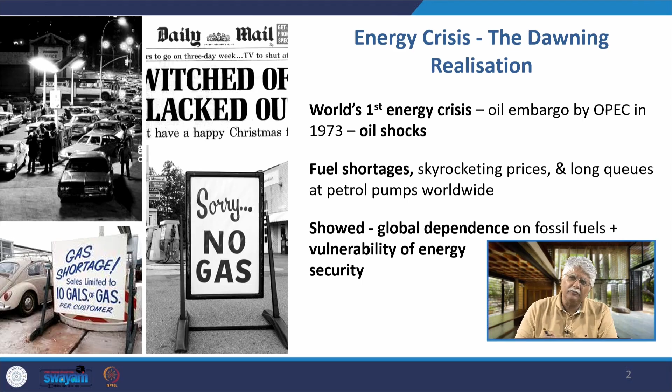There was an oil embargo by the oil producing countries, the organization called OPEC, and this sent oil shocks all over the world. There were fuel shortages, skyrocketing oil prices, long queues at petrol pumps, and this showed there is a global dependence on fossil fuels and the vulnerability of energy security.

Then the impact of carbon emissions on climate. The damage from carbon emissions began to be understood from the 1960s, but there was a strong global recognition in the 1970s to 1980s. Early reports started coming out as early as 1979 with the report Carbon Dioxide and Climate, a Scientific Assessment, the Charney report.

In the 1980s, private documents by oil companies like Shell and Exxon that were secret warned about climate change. Then important milestones came about. In 1987, the Brundtland report came out, and that framed sustainable development globally, influencing building policy.

In 1990, the first green building standard certification called BREEAM came out in the UK. BREEAM stands for Building Research Establishment Environmental Assessment Method. It focuses on energy, materials, pollution and health. In 1993, the US Green Building Council was formed, the USGBC, and the LEED rating system was established in 1998. Around this time, concepts like life cycle energy and embodied carbon began appearing in research work.

Another important milestone in 1997 was the Kyoto Protocol called COP3, the first binding international agreement to reduce greenhouse gases, and buildings were identified as a major sector for energy reduction or carbon reduction.

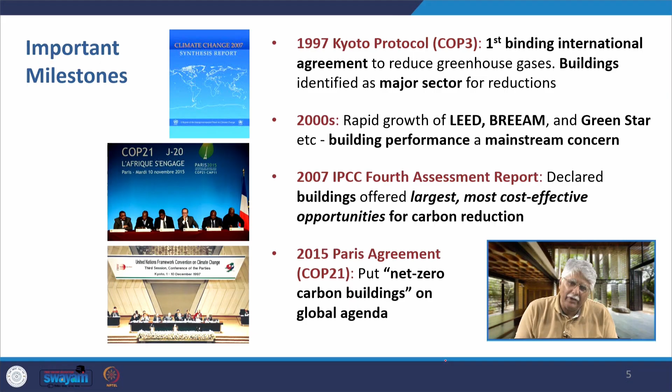In the 2000s, there was rapid growth of LEED, BREEAM, Green Star, etc. Building performance became a mainstream concern, and in 2007, the fourth IPCC assessment report declared that buildings offered the largest, most cost-effective opportunities for carbon reduction. The 2015 Paris Agreement, COP21, put net zero carbon buildings on the global agenda.

Probably last year a UN report by the IPCC came out that declared what was called Code Red, that global temperature was likely to rise 1.5 degrees Celsius in the next 20 years. But 1.5 degrees Celsius from what? From the time of the Industrial Revolution. Global temperature would rise 1.5 degrees Celsius above the temperature during the time of the Industrial Revolution. If that happens, there will be irreversible climate change and global warming.

Already we are seeing the impact of tremendous climate change. Literally a climate change catastrophe is happening with extreme heat waves, drought, flooding, melting glaciers, rising sea levels, especially in areas where we never expected before. Floods, for example, in Frankfurt, droughts in areas that did not witness them before, forest fires are happening.

As a result of this, globally there have been caps established on the amount of carbon emissions nations can emit. For India and China, the cap for bringing the country to net zero carbon level is 2070. That is, by 2070, India is striving to become a net zero carbon nation. Currently, in global carbon emissions, China is at the forefront with 27%, USA at 11%, and India is the third largest carbon emitter with 7%.

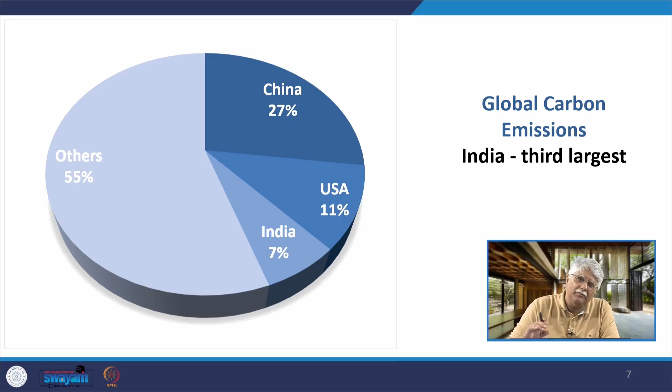Now, when we talk of carbon emissions or energy consumption in buildings, what are we really talking about? We are talking about two things. One is what is called embodied carbon or embodied energy, that is the energy required to make the materials, manufacture the materials used in construction, and to transport them to the site of construction, the overall energy that is embedded in the materials. The second is the operational energy or operational carbon, that is the energy consumed during the operation of the building.

Data reveals to us that buildings contribute to a total of 38% of carbon emissions globally. They are the major contributors according to the 2020 Global Status Report for Buildings and Construction by the United Nations Environment Programme.

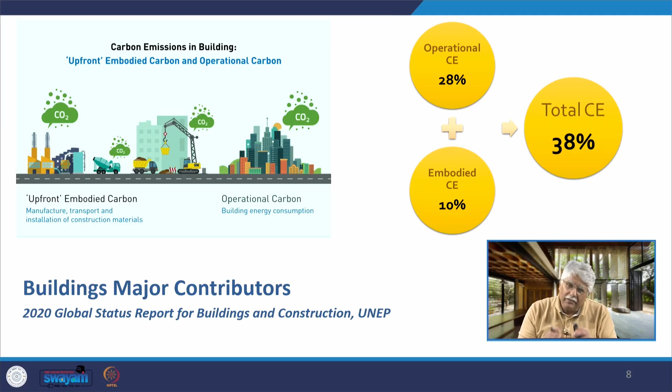So that is why it is vital for us to target buildings to lower carbon emissions, to lower the energy that they consume. Now, in order to understand the difference between a sustainable building and a green building, the concept of sustainable development or sustainability incorporates three principal things: number one is the environment, number two is the economic aspect, and number three is the social aspect, or the people. All three put together lead to sustainability or sustainable development.

But green buildings specifically focus on the environmental aspect of sustainability. That is the difference between being sustainable and being green.

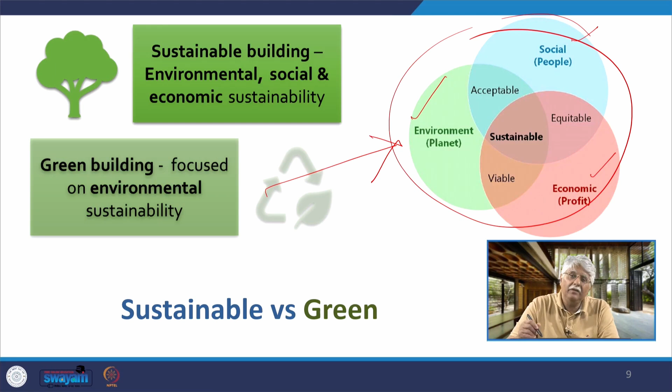There has been a lot of impetus to make green buildings, and now we are also moving towards more sustainability, meaning the social and economic aspects are also becoming important. When we look at the sustainable development goals set up in 2015 by the United Nations General Assembly, intended to be achieved by 2030, out of these SDGs, there are 9 that are a direct impact of green buildings.

So what is a green building? I will give you very simple definitions, you can go and read the detailed definitions later. A green building is the reduction of the negative environmental impact through the design, the construction, and the operation of a building.

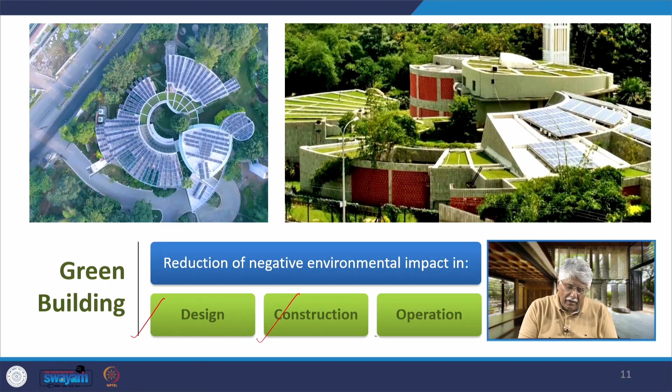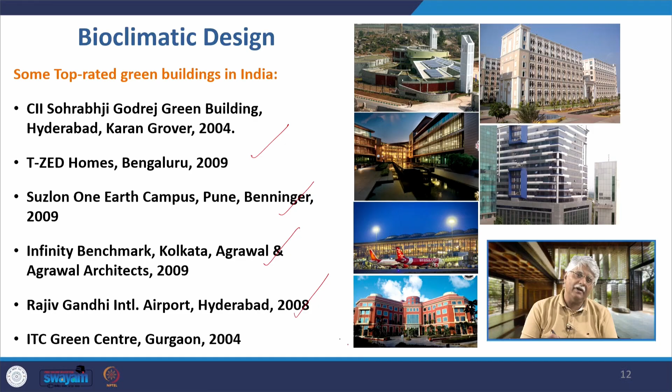When we talk of bioclimatic design, there are some top rated green buildings in India. The one we will be looking at is the CII Godrej building in Hyderabad by Karan Grover. Then there is the T-ZED Homes in Bangalore, Suzlon One Earth campus by Christopher Benninger in 2009, Infinity Benchmark in Kolkata, the Rajiv Gandhi International Airport in Hyderabad, and the ITC Green Center in Gurgaon in 2004.

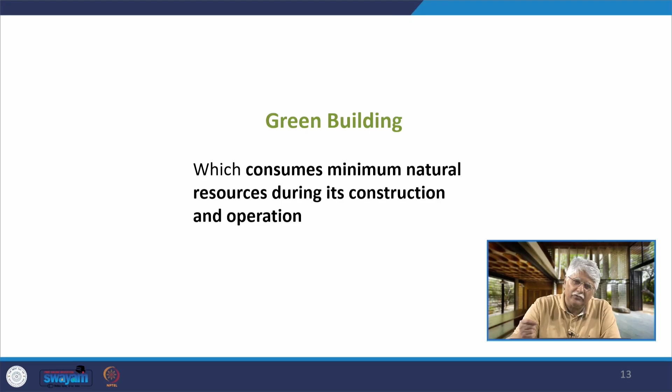So, a green building is that which consumes the minimum natural resources during its construction and operation. There is increasing efficiency with which buildings use resources, energy, water and materials, while reducing the building's impact on human health and environment through better siting, better design, construction, operation, maintenance, and finally the demolition and removal of the building. The entire building life cycle is a model of a green building.

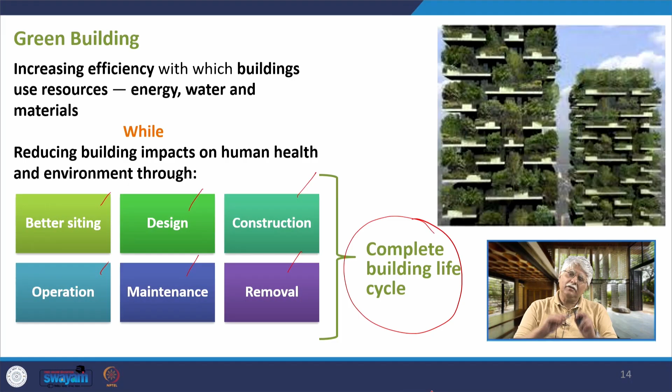So when we talk of life cycle energy requirement, we look at two things: the embodied energy, which is the energy needed to quarry, manufacture and transport materials used in building construction, and the operation energy, which is the energy to operate the building, used by occupants for heating, cooling, ventilating, lighting, operating equipment, etc.

How do you reduce operating energy? Today in this presentation we are not looking at the embodied energy or embodied carbon aspect of it, though that is also considered. More energy efficient, low carbon materials need to be used as part of the overall green building concept.

But when we talk of operating energy, two things are important. One is energy saving. How do you save energy? There are passive and active means to save energy in a building: by improving insulation, by automated ventilation controls (the active part), by lighting control using natural light, by lighting control using motion detection sensors, by high efficiency light fixtures, by rooftop planting, which are called roof gardens today. Through all this we are trying to save energy.

The second part is energy making, through, for example, photovoltaic generation, use of solar PV panels. So on one side we are saving energy, lowering the amount the building consumes. On the other side we are making energy. The energy the building still consumes is provided by the building itself through things like photovoltaic panels or even geothermal energy, among other means being explored today. Both these aspects can work together to lower the energy consumption of a building, or the energy it takes from the city grid.

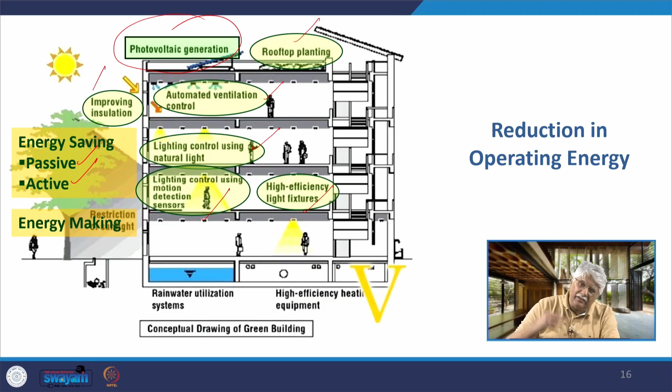Why make buildings green? Not only because of the critical issue of lowering carbon emissions, but also studies reveal that productivity gains up to 16% happen with green buildings, because they reduce absenteeism and improve work quality, or the overall indoor environmental quality. Therefore, there are environmental, economic and social benefits for all building stakeholders. So here we are actually looking at the very essence of sustainability.

Though it is a green building, it is also impacting economic and social aspects because there is less absenteeism, the indoor environment is better, people find it better to work. Economically that benefits the companies or corporations. So owners, occupants, general public—everybody benefits with these green buildings.

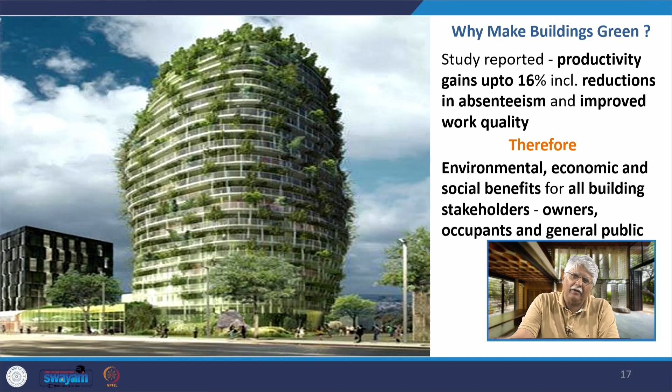Green building should create delight when entered, serenity and health when occupied, and a regret when departed. This is a statement from the book called Natural Capitalism.

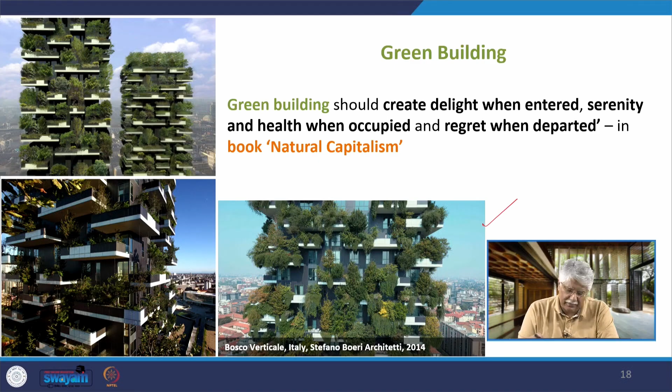The building you are seeing in this picture is the Bosco Verticale, the vertical forest in Italy, by Stefano Boeri Architetti, 2014. There is another building, the One Central Park in Australia by Jean Nouvel, another green building from 2014.

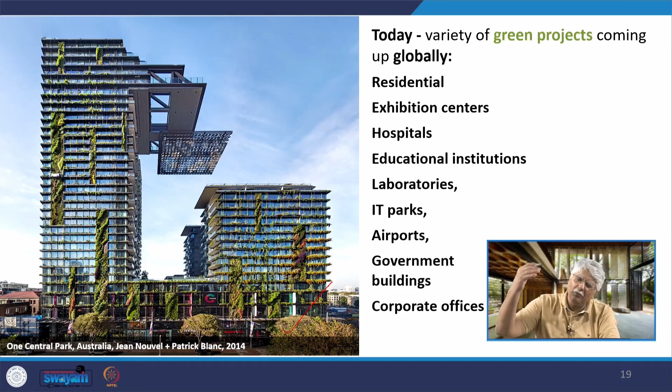Today there are a variety of green projects coming up globally: residential, exhibition centers, hospitals, airports, laboratories, IT parks, corporate offices, government buildings—so many building typologies in which green buildings are being made. Why are people attracted to green buildings?

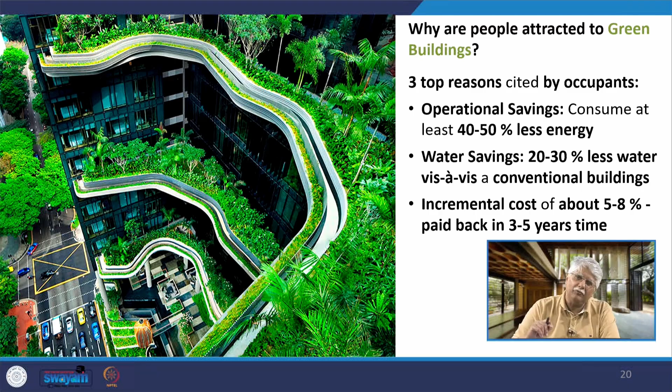The top 3 reasons are: operational savings, 40 to 50% less energy consumed; water savings, 20 to 30% less water vis-a-vis conventional buildings; and an incremental cost of 5 to 8% over the conventional building, which is paid back in 3 to 5 years time, known as the payback period.

There is also better daylight and views. The working environment improves, access to daylight and views is there, productivity of people goes up, air quality improves—it is fresh and healthy. Interior materials are also used in a way that they have low carbon emissions.

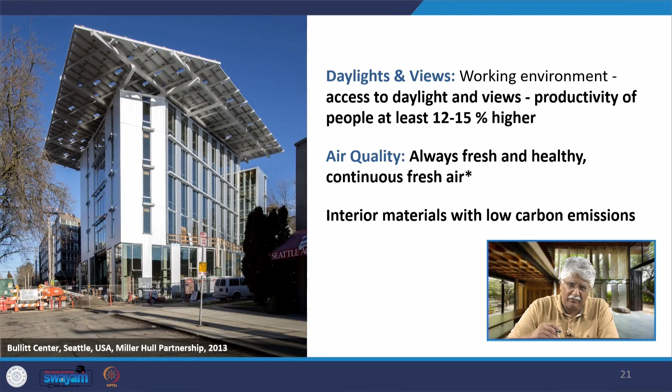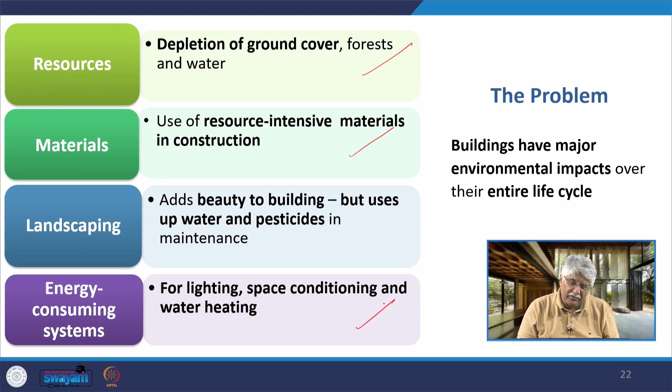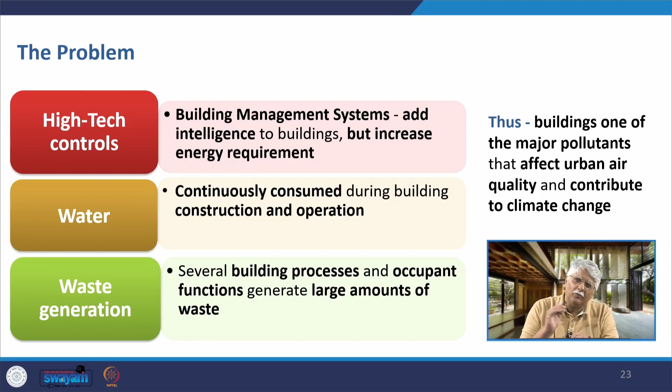We use high-tech controls and building management systems that add intelligence to buildings but require a lot of energy. Water is continuously consumed during construction as well as operation, and waste is generated—several building processes and occupant functions generate large amounts of waste. Thus, buildings are one of the major pollutants affecting urban air quality and contributing to climate change.

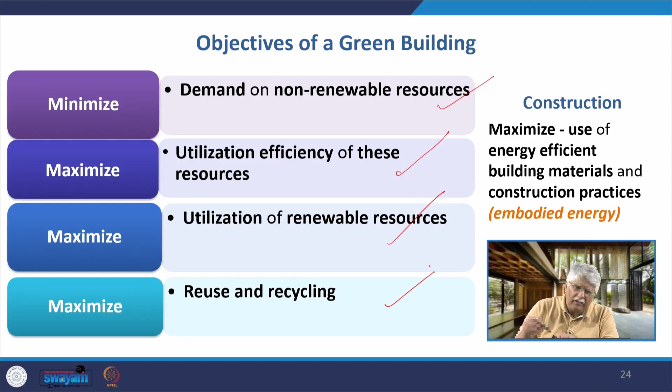That is why the objective of green building is to maximize the use of energy-efficient materials and construction practices—minimize the demand for non-renewable resources, maximize the utilization efficiency of the resources we use, maximize the utilization of renewable resources, and maximize reuse and recycling. All these concepts are evolving even further today.

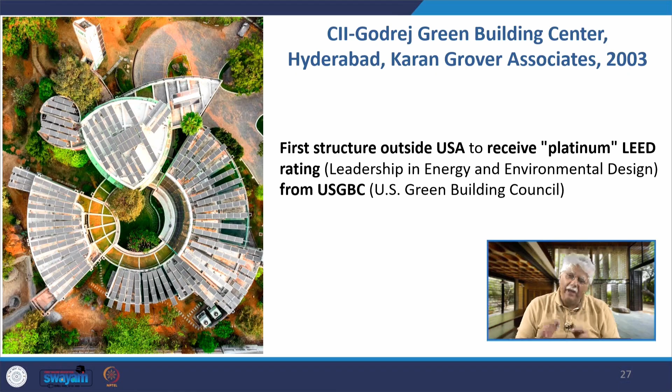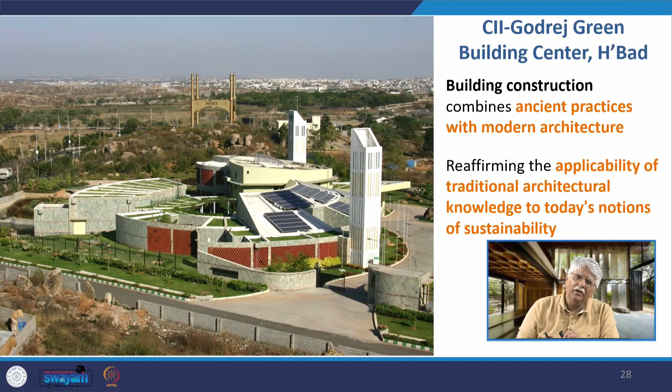The CII Godrej building in construction combines both ancient practices with modern architecture, reaffirming the applicability of traditional architectural knowledge in today's notions of sustainability. The building is green not just in its making but also in its purpose to promote sustainable practices in India.

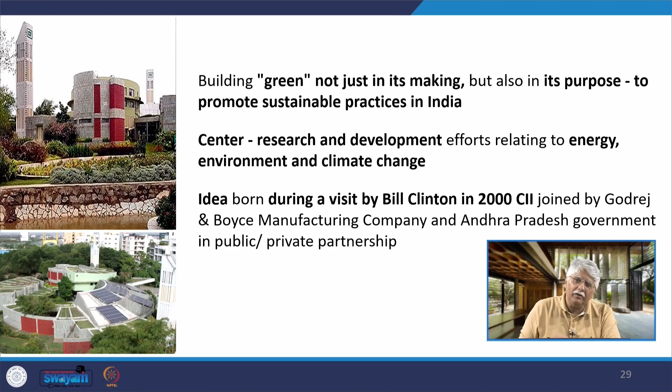The center is for research and development efforts related to energy, environment and climate change, and the idea was born during a visit by the then President of America, Bill Clinton, in 2000. Karan Grover Associates in Baroda are the architects behind it, and they developed a design scheme to respond to both the cultural and environmental context. The building was to be a showcase for energy-efficient, eco-friendly architecture, an integration of age-old practices with sustainable practices using modern technologies.

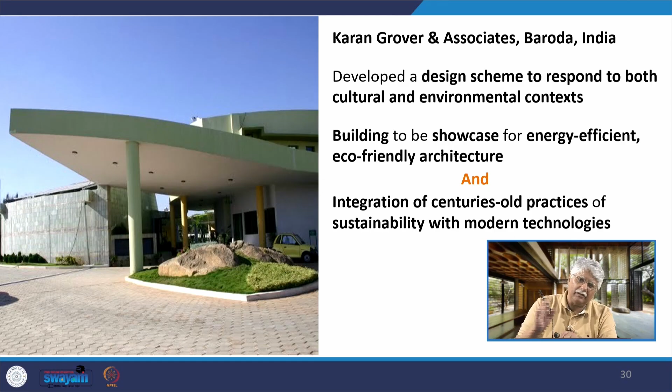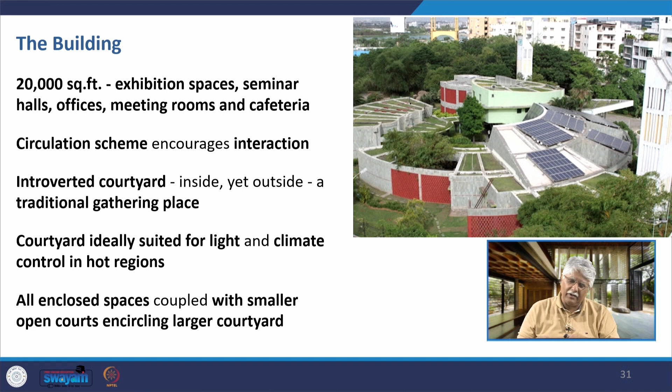The building is 20,000 square feet of space with a circulation scheme that encourages interaction. It has an introverted courtyard—inside yet outside—leading to traditional gathering spaces, ideal for bringing natural light into the building and for climate control in this hot region. All enclosed spaces are coupled with smaller open courts which encircle the larger courtyard.

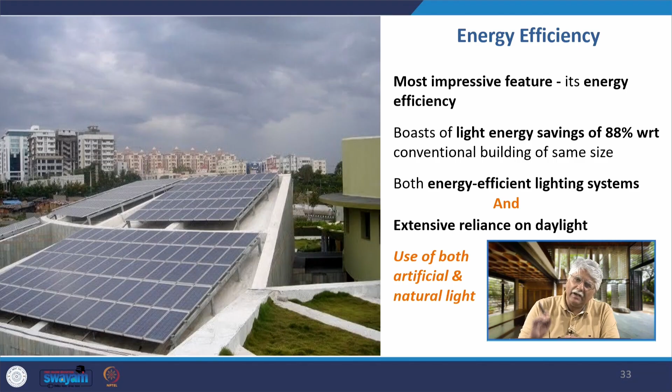The large central courtyard is key to the sustainability success. Energy efficiency is the most impressive feature, boasting light energy savings of 88% compared to a conventional building of the same size, through both energy efficient lighting systems and extensive reliance on daylight.

Cool north light is brought into the building and washes the interior spaces. The courtyards act as light wells, illuminating the adjacent work areas. When light is insufficient, sensors trigger energy efficient electric lights. Dimmers automatically control illumination levels, turning lights off when unnecessary, and occupancy sensors prevent lights from switching on at unoccupied workstations.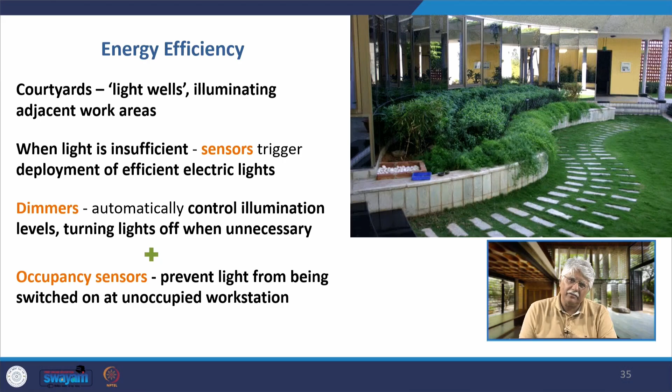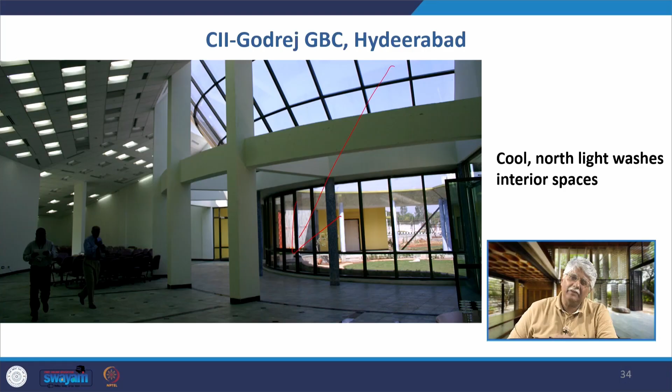Please remember that this building was made much earlier, in 2003. Over this time, much more development has taken place in green building and energy efficient design. Far more new strategies are now being implemented, but we look at it as an important landmark.

in green building design in India. The building layout ensures that 90% of spaces have natural light access and views to the outside. In some areas, jalis are used to prevent glare and heat gain while ensuring adequate daylighting and views. The jali also gives aesthetic appeal to the space.

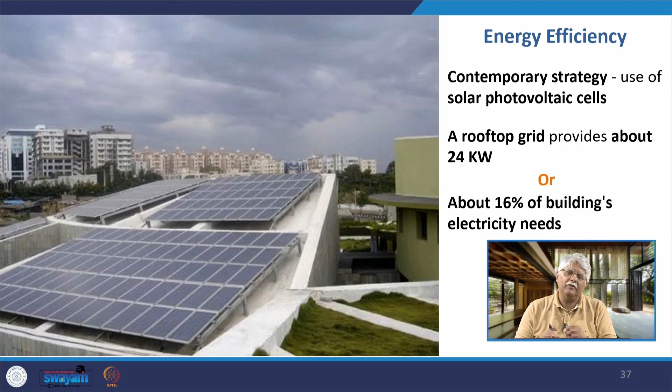A contemporary strategy for energy efficiency is the use of solar photovoltaic cells. There is a rooftop grid that provides about 24 kilowatts, meeting approximately 16% of the building's electricity needs through solar PV panels. For energy efficiency, another traditional method from the Middle East has been used.

These two wind towers you see here are traditional elements that catch air at a height and cool it as it passes down the tower. That cooled air is then pumped into the HVAC system, or the air handling unit of the air conditioning system, cooled by up to 8 degrees Celsius, bringing a substantial reduction in the air conditioning load. The roof itself is heavily insulated, further reducing the overall cooling load.

Just to repeat this again: hot air from the top is pulled into the tower. As it comes down, it is pre-cooled within the tower, and this cooled air is fed into the air handling unit.

So what happens? For example, if the outside temperature is 45 degrees, the air conditioner has to bring that down to about 26 degrees Celsius within the building—a drop of about 19 degrees. But because of this system, that 19 degree drop becomes just about 11 degrees Celsius, which tremendously lowers the cooling load of the building.

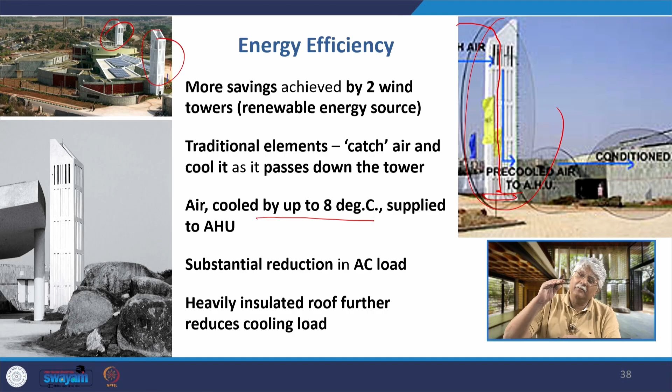There is also sensitivity to the context. Part of the green task is to minimize damage to natural elements during construction and occupancy. Water flow, air quality, vegetation, topography—all aspects are looked at. The building form responds to a rocky site.

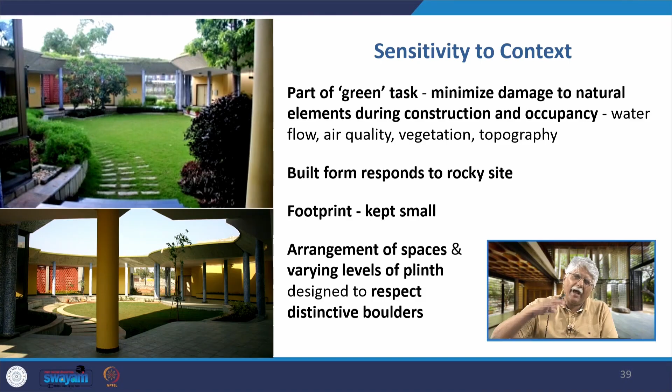The footprint of the building is kept small. The arrangement of spaces and varying levels of plinth are designed to respect the distinctive boulders, keeping the topography of the site as intact as possible. During construction, barricades were installed to prevent contaminants from the site spreading to surrounding areas.

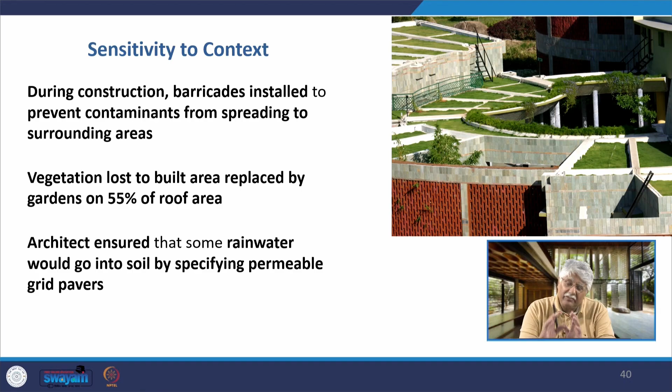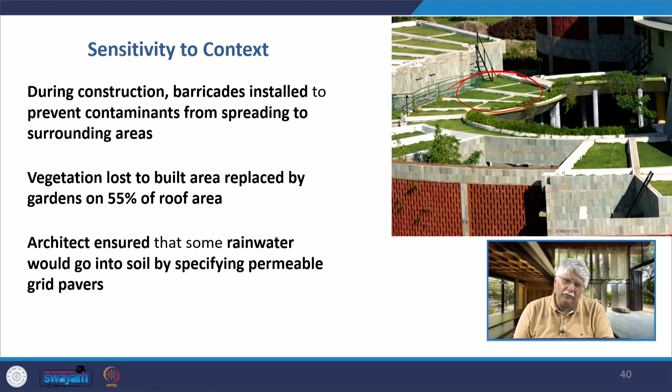The vegetation lost to the built area was replaced by rooftop green spaces or roof gardens, up to 55%. The architect ensured rainwater would go into the soil by specifying permeable grid pavers. The remaining rainwater follows the existing flow pattern of the site and is collected in a water pond, another traditional method, constructed at the lower end of the site.

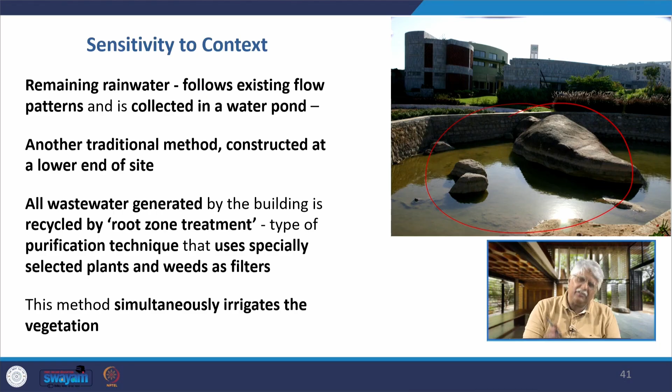All wastewater generated by the building is recycled through what is called root zone treatment, a purification technique that uses specially selected plants and weeds as filters. This method simultaneously irrigates the vegetation. Treated water is also directed to the pond and used for domestic purposes.

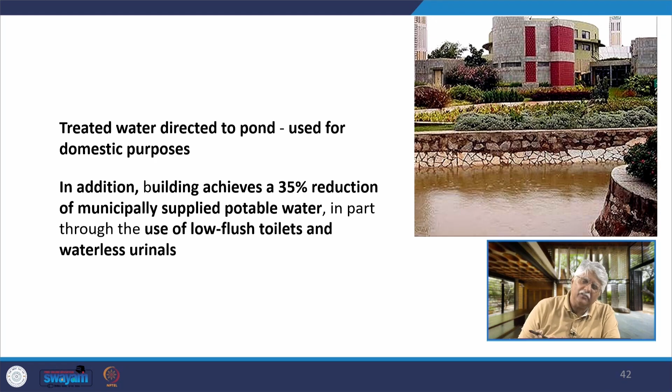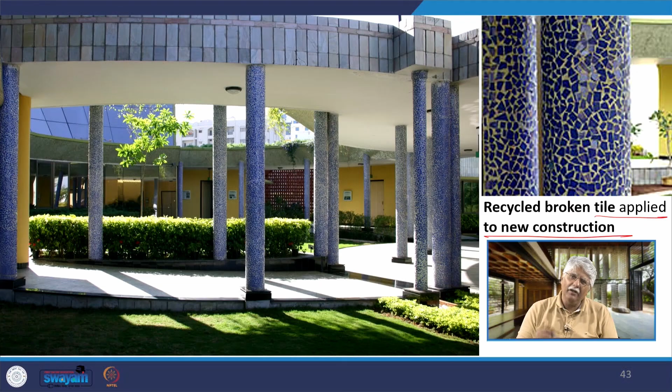In addition, the building achieves a 35% reduction of municipally supplied potable water, in part by using low flush toilets and waterless urinals. Another aspect is that broken tiles from construction are reused, applied on the columns as trencadís—a technique I've already discussed in the works of Gaudí—the use of broken tiles.

Again, the sensitivity to context is that building occupants are encouraged to minimize their reliance on fossil fuel based transportation. The building is located near a public transport station, so people can use public transport to come to work. Bicycle riders are treated preferentially, provided facilities like convenient parking, lockers and showers. 30% of users have shifted to alternative modes of transportation like carpools, bicycles and cars that run on LPG.

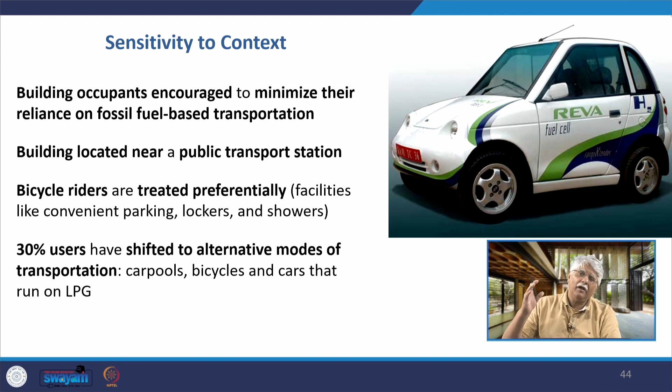This was back in 2003. Employees were also encouraged, and the center bought locally available, locally made electricity driven cars called REVA, in the hope that employees will buy alternate energy powered cars in the future. This is an old story now, because today EV cars are becoming very important even in our country, and all over the world we are moving towards a situation where most of our vehicles will be EV vehicles.

Documented reduction of harmful emissions through design, siting and construction indicate there is at least 62% reduction in carbon monoxide, 63% in hydrocarbons and nitrogen oxides through this building. This demonstrates that traditional knowledge is valid today and can be used in conjunction with modern architecture to achieve these levels of sustainable design. It earned a very high LEED rating of 56 credits, a platinum rating, which urges us not to turn our backs to history in our quest for modernity.

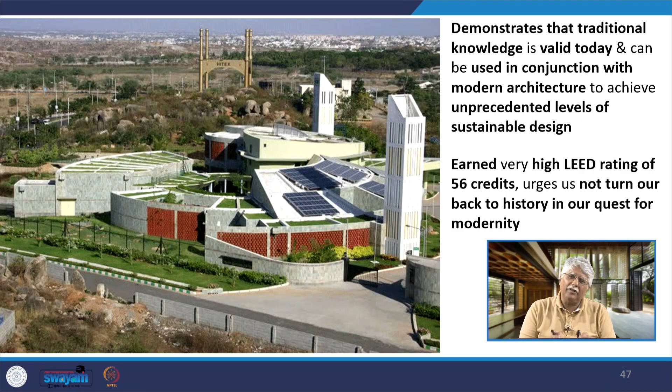So this building in 2003 formed a benchmark of green building design, but like I said, a lot of other developments have happened over time. Let's look again at a benchmark building of 2006, the Hearst Tower in New York by Norman Foster, a green high-tech building.

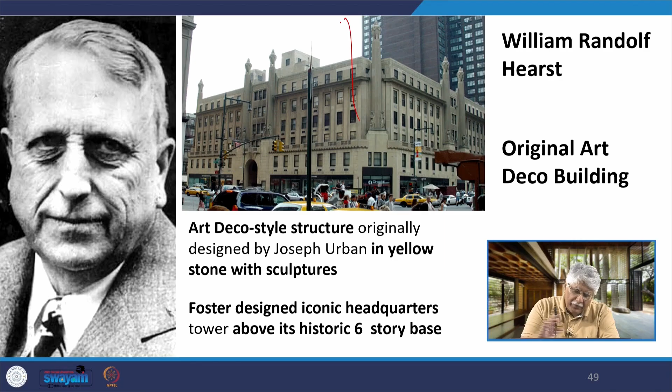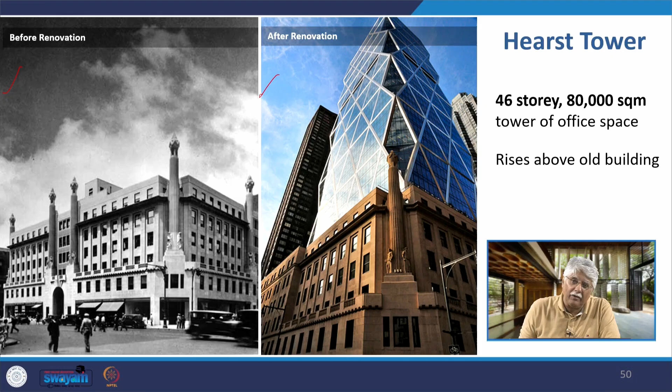The earlier building there was built for William Randolph Hearst, an Art Deco structure originally designed by Joseph Urban, and Foster designed his iconic tower above it while keeping intact the 6-story base. This is the before renovation picture, and this is the after renovation picture. It's a 46-story building with 80,000 square meters of office space rising above the old building.

It is a pioneer in environmental sustainability, the first commercial office building to receive the gold LEED certified rating for core and shell interiors in New York City. In deciding upon the rating, the council considers aspects like site selection, water and energy use, indoor environmental quality, and the type of construction products used.

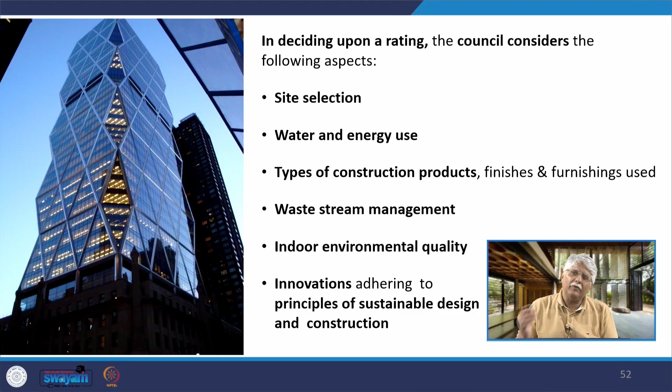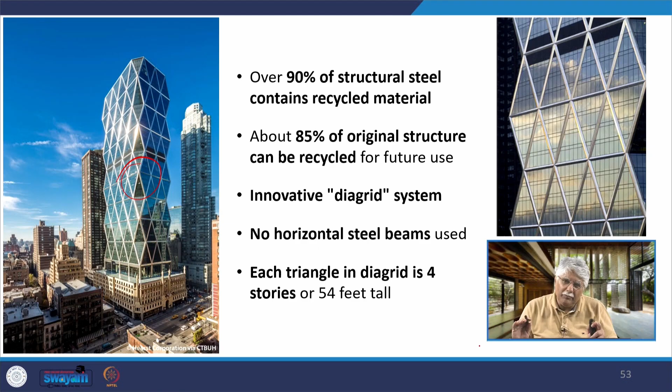Over 90% of the structural steel used in this building has come from recycled material, and about 85% of the original structure can be recycled for future use. It has an innovative diagrid system, which we have already seen in the Gherkin, the Swiss Re building, also by Norman Foster in London. There are no horizontal steel beams used. Each triangle in the diagrid is 4 stories or 54 feet tall.

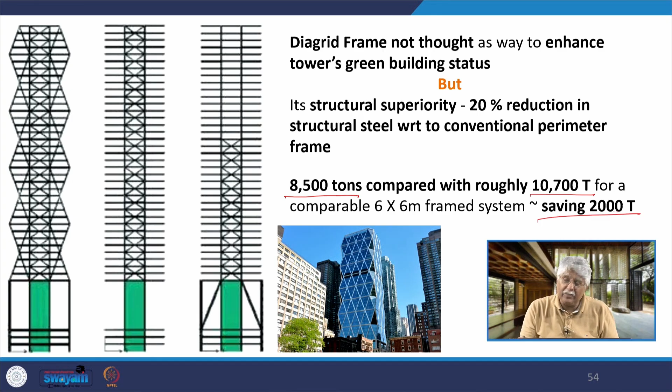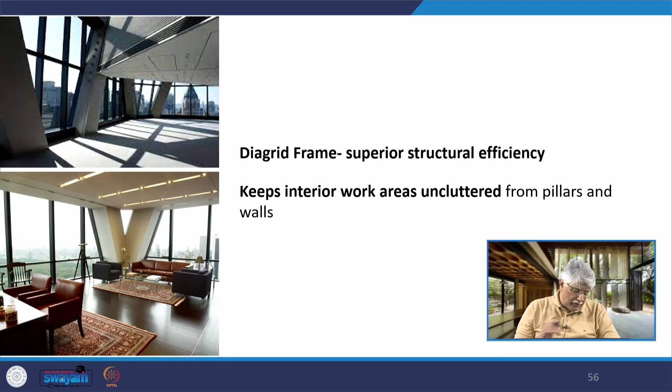The diagrid frame was not thought of as a way to enhance the tower's green building status, but what happened was the structural superiority of the diagrid reduced the overall steel required for the structure by 20%. This building uses 8,500 tons of steel as compared to roughly 10,700 tons for a comparable building of this size, saving 2,000 tons of steel, a major contribution towards this green building status. This is how the form of the building evolved, the diagrid frame, which also has superior structural efficiency, for example keeping interior work areas uncluttered from pillars and walls.

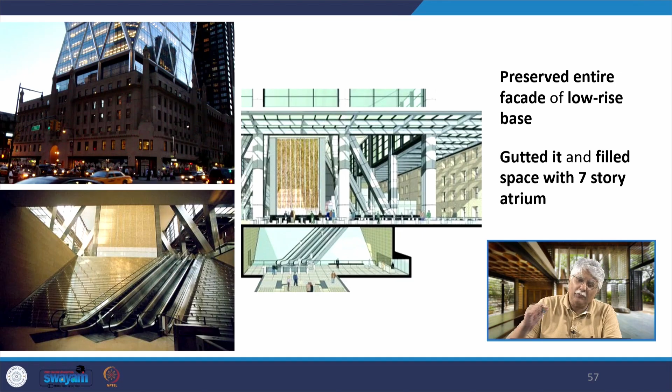Now, the entire facade of the low-rise base has been preserved. It was gutted and filled with a 7-story atrium. The lobby with atrium occupies the entire floor plate, and then rises through the 6 stories of the old building, which has the main elevator lobby, cafeteria, auditorium, etc.

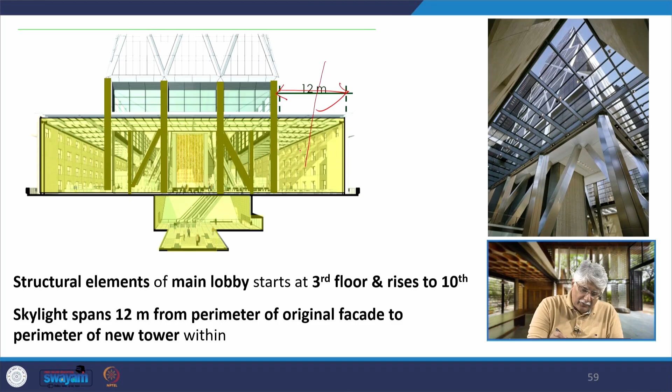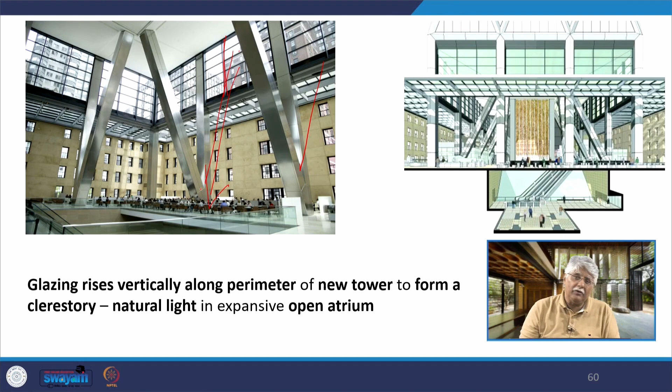There is a transparent skirt of glazing that you see here, which brings natural light into this space. The structural elements of the main lobby start at the 3rd floor and rise up to the 10th floor. This 12 meter skylight glazing provides natural light into the building. Along with that, there is glazing rising like a clerestory window on the perimeter of the new tower, which also brings in natural light. So from the skylight and the clerestory window, natural light floods into the 7-story atrium space, showing how the atrium, clerestory, skylight and diagrid together form the structure.

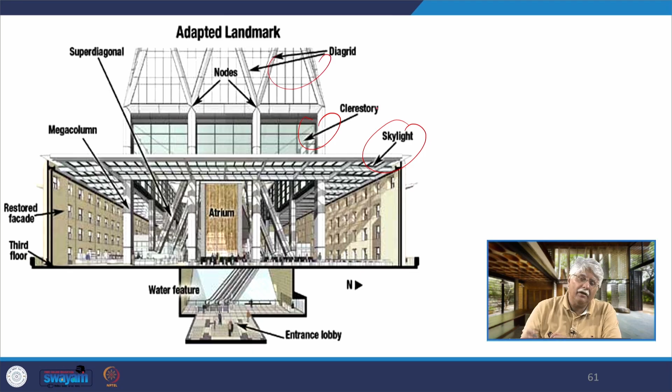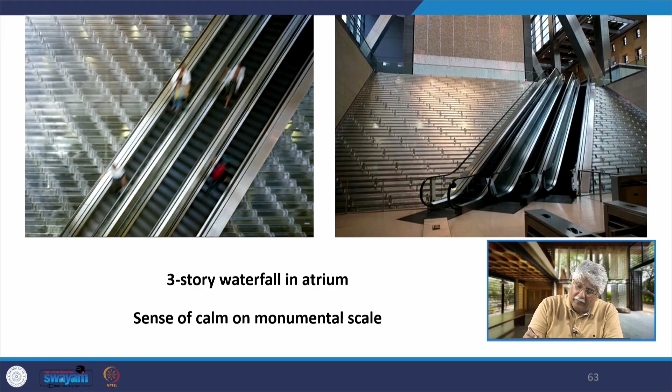So the lobby is the celebratory communal space, it is a town square, and there is also a 3-story waterfall provided in the atrium called the Icefall, and the sense of calm in this monumental scale, it is the nation's largest sustainable water feature. It is a 3-story high stepped slanted waterfall with angled escalators.

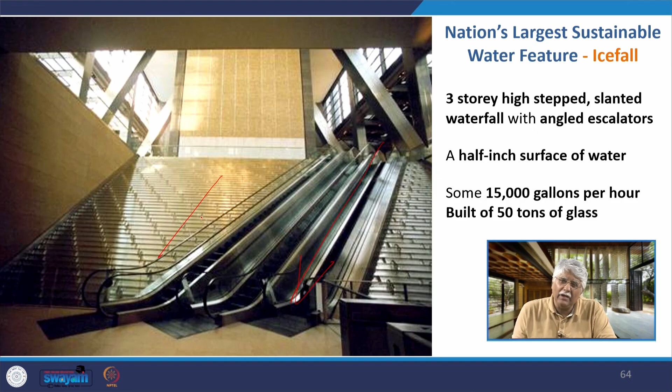There is a half-inch surface of water and some 15,000 gallons per hour of water. It is built of 50 tons of glass. The waterfall helps control the climate in the building by providing humidity and by cooling the large atrium in summer, thus reducing the energy cost of the building.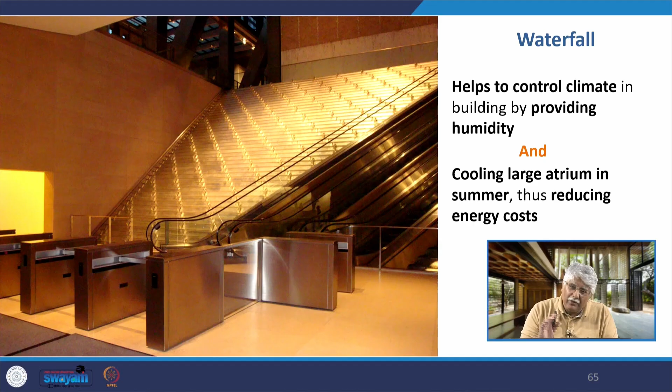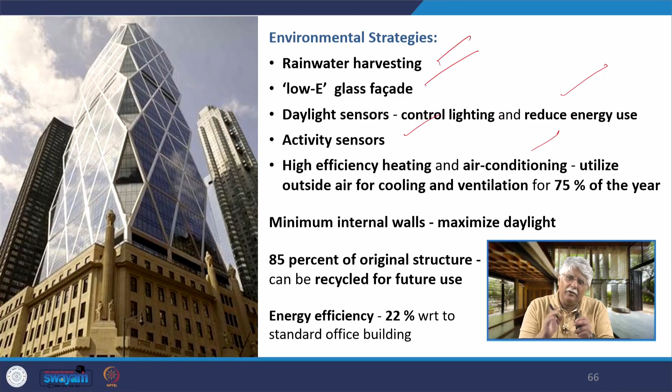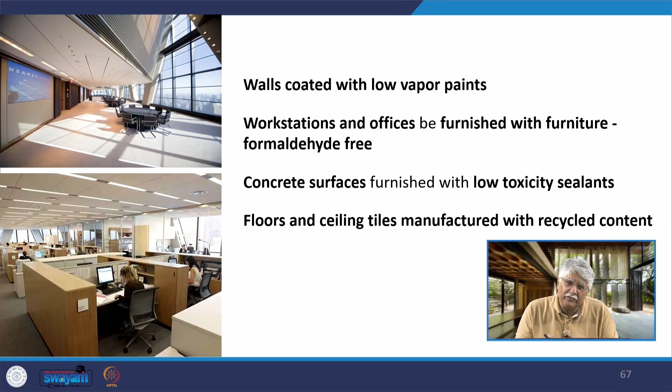85% of the original structure can be recycled. Energy efficiency of 22% with respect to a standard office building. Walls are coated with low vapor paints. Workstations and offices are furnished with furniture which is formaldehyde free. Concrete surfaces are furnished with low toxicity sealants. Floors and ceiling tiles are manufactured with recycled material.

Therefore, it got the International High Rise Award in 2008. This sustainable office was the first green building in New York to receive the gold LEED rating of core and shell, an iconic building, yet a very environmentally responsive tower.

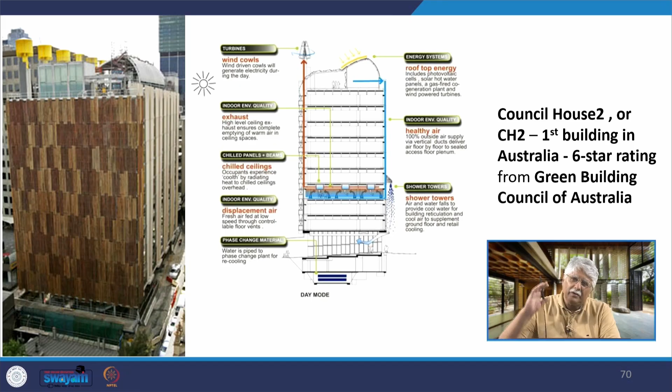There are wind power turbines that cool the building at night. Chilled ceilings are used. The building power system includes photovoltaic cells, solar hot water panels, and a gas powered cogeneration plant. A cogeneration plant is one where the fuel used to produce electricity has its heat reused again for other purposes within the building.

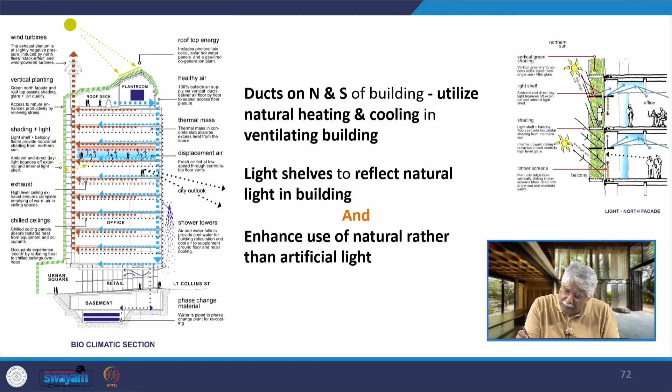The ducts are on the north and south of the building, utilizing natural heating and cooling in ventilating the building. There are light shelves provided that bounce light into the building, increasing the overall natural light in the interior. The north facade, because Australia is in the southern hemisphere, gets the maximum light. In our case, that would be the south facade in the northern hemisphere.

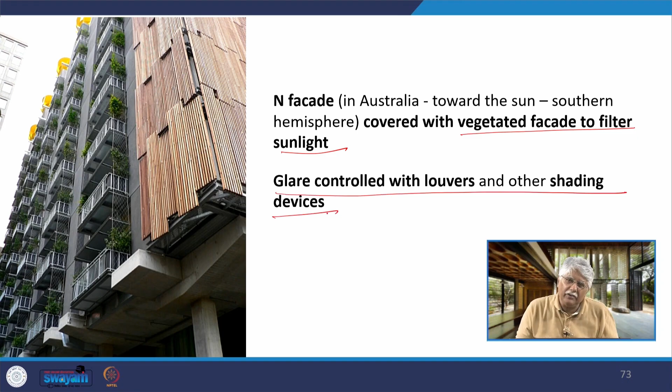Therefore, it is covered with a vegetated facade to filter the sunlight, and the glare is also controlled with louvers and other shading devices. Recycled timber louvers are used and are controlled by photovoltaic cells.

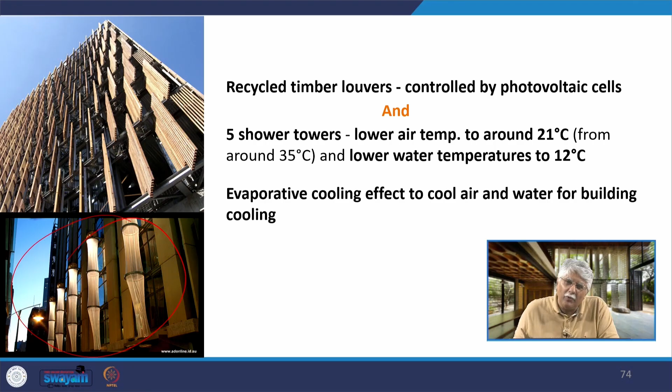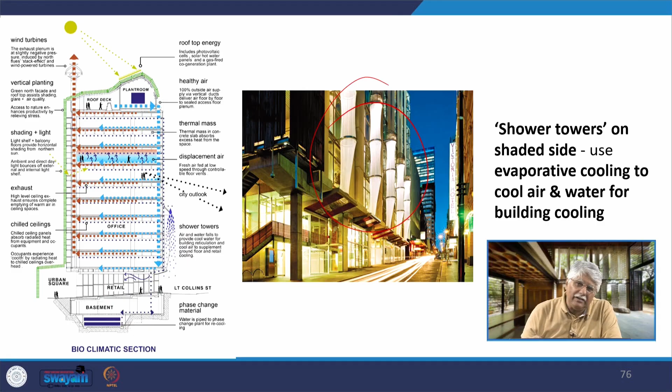There are 5 shower towers provided to lower the temperature to around 21 degrees centigrade and lower the water temperature to 12 degrees centigrade, using evaporative cooling effect to cool both air and water for the building cooling. Recycled timber louvers have been used, and these are the shower towers on the shaded side. Please read the detail about this building to understand more about the shower towers.

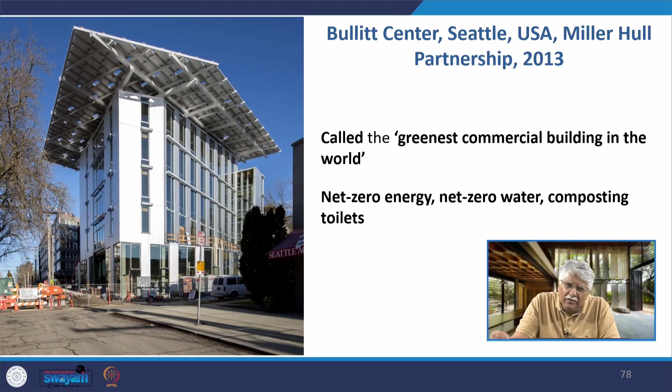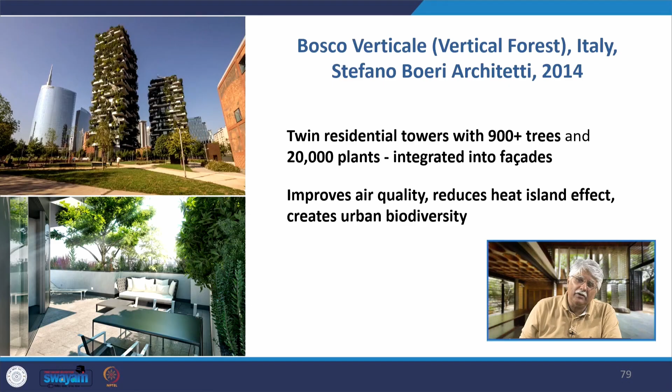Some examples of contemporary green buildings show how fast we have moved in the way green buildings are being designed today, like the Bullitt Center in Seattle, called the greenest commercial building in the world, with net zero energy, net zero water, and composting toilets. The Bosco Verticale, the vertical forest we just saw, twin residential towers with 900 plus trees and 20,000 plants integrated into the facade, improves air quality, reduces the heat island effect, and creates urban biodiversity.

The Edge in Amsterdam, considered to be the smartest green office building in the world, built for the Deloitte company, uses solar powered aquifer thermal energy storage and integrated smart systems. If you recall a few lectures back, I talked a little more in length about this building.

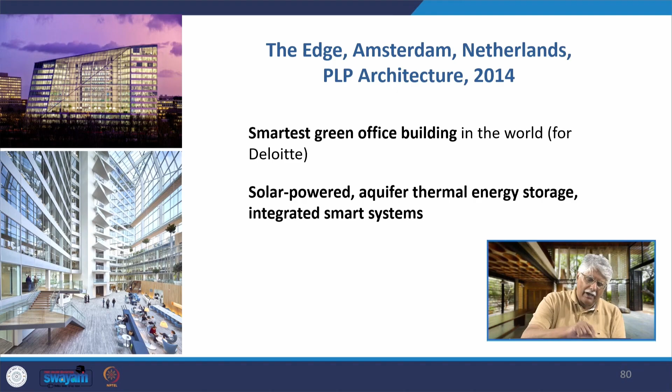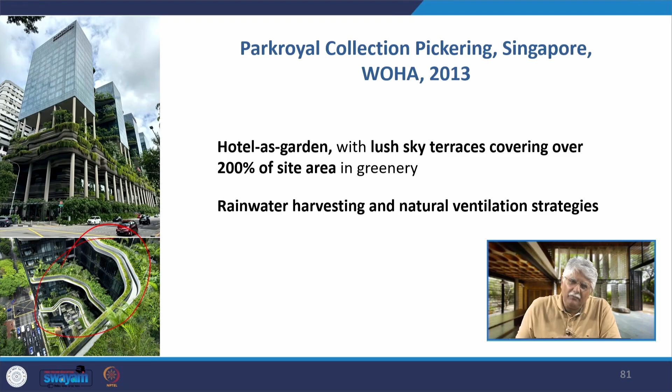Then there is the Parkroyal Collection Pickering, Singapore, a hotel designed as a garden with lush green sky terraces covering 200% of the site area in greenery. Rainwater harvesting and natural ventilation strategies have been used.

Thus we find that green buildings have come a long way today, and far more strategies are being employed. A lot of research is being done to make our buildings more and more sustainable, more and more low carbon, more and more green. Thank you.